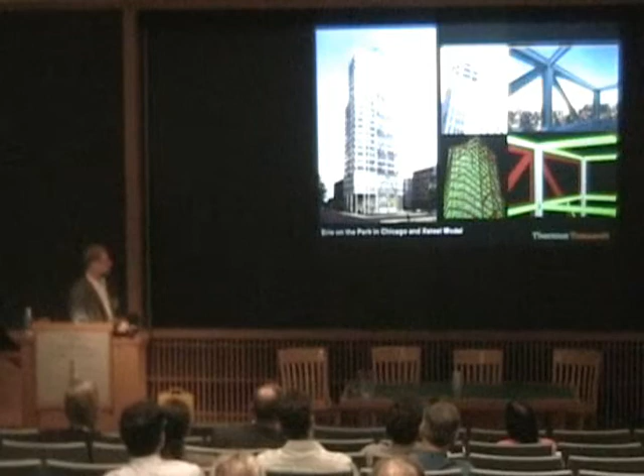But in any event, that led to our use of building information modeling, at least for structural steel, on Soldier Field. It's a major project that had to be built in 20 months, and it led the team to adopt this technology to improve the prospects for getting steel erected on time and hopefully having things fit together. As it happens, it was a partial adoption.

It was pretty much the only thing besides cladding that was done in 3D, and the only reason why cladding was done in 3D was because Permasteelisa was hired to do the cladding, and they have done so many Frank Gehry buildings that that's the only way they work now. And so they were delighted to receive a 3D model of the steelwork and, in a sense, clothe the outside of the building like a tailor and make sure it fit.

So things like the precast that you see here, which I'll get to in a second, could have been added into that model, but it wasn't. There were a lot of other things, mechanical, electrical. So it's a case study of partial adoption rather than full adoption. And the lesson learned from that is it's still worth it. It's still worth jumping in and trying something, not waiting until everything's perfect.

And these are some examples of, this is again a program called XSteel, which later has been termed Tekla Structures. It's from a firm in Finland. And it's among a handful of products like this that are vertically integrated within the steel industry that tie together all the way from the design end through cutting and punching and erecting steel. And it really is what you see is what you get.

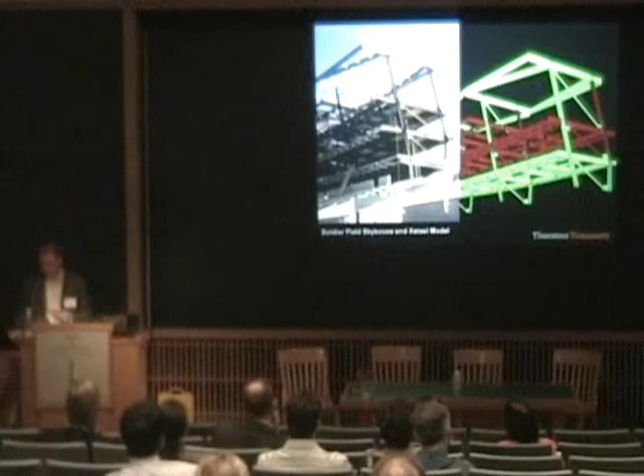These are other examples of that. These are really the kind of things we saw for shop drawing submittals. Speaking of shop drawing submittals, this is one of them. So this is how we review shop drawings. Rather than look at thousands, tens of thousands really, of piece drawings, drawings of each individual piece with holes cut in it, which are somewhat meaningless because they're not in context, we don't ever look at any of those. We're just looking at things in 3D and then more global erection drawings. And that sort of speeded the process.

And this is fundamentally why the steel industry has adopted this. If you're still in business, to borrow from Thom Mayne, if you're a steel fabricator and you haven't invested in equipment like this, you're probably out of business because your competitors have. Now, in order to run this equipment, you need computers, and you have to get code into that computer.

And until programs like XSteel came along, this is the sort of fallacy of the old way of doing things. In the old way, I would do a design drawing that would be 2D. I'd send it out to bid. Someone would win the bid. Then he'd do a whole new set of drawings called shop drawings. He'd send them back to me. I'd look at them. I'd find any errors I could. I'd stamp it with a stamp that said something like, even if I make a mistake, it's not my fault. Because that's what it says in the contract. And I'd send it back.

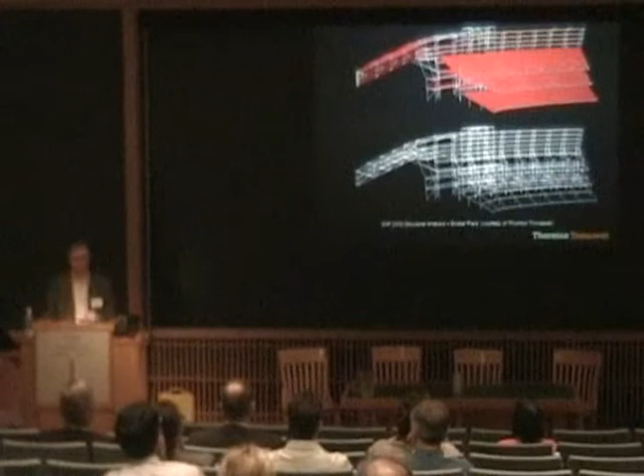So that's the reality of the steel industry, and that's the reality of most industries that produce products that we use to build buildings. And that's why people that can embrace that technology figure out how to use it for you rather than against you. Doesn't mean we have to build cookie cutter buildings. We can build great architecture, as has been proved by Frank Gehry, but we have to learn how to use that system. So that's a long sort of preamble, but the steel industry really has set the stage for this.

Now, in the meantime, it's taken a while for the software industry to catch up. The steel industry, this is a typical sort of three-dimensional model that we used on Soldier Field. Back then, 6 years ago, that was not integrated with the modeling side. So like we have been doing for decades, we've had to do that model and start a whole new series of models for representation. As someone said earlier, this sort of set of the analysis side versus the, Kate said

that there's these two worlds. Now those are being merged, at least on the structural engineering side. Tekla has merged it, Revit Structure is merging it. And the notion is that we build one model, we continue to update it to reflect coordination with architecture, mechanical, and all the other constraints. But at the same time, we're able to go away and do analysis.

And an example of that is Revit Structure. Here, in fact, how it does it is it carries two representations embedded on top of each other. That's fundamentally at least how Revit does it. And there are other ways of doing it, but an easy way to do it is when you put a column in or a floor beam, even if it's sloped, you create a sort of theoretical model, and we've seen some of those today, that's in the background, and those two things are linked.

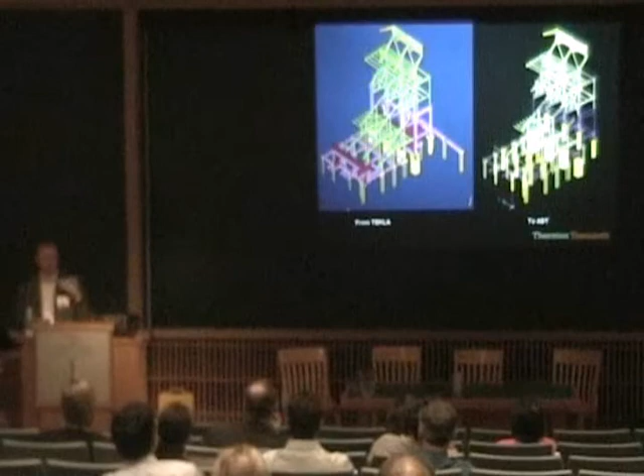The problem is interoperability. How do we get things from one type of software into another? And Tekla, which we use for steel detailing, we have found ways to get it into Architectural Desktop. There are ways to get it into Revit. So that, again, wasn't so 6 years ago. So things are moving quickly here, and in a good way. This technology is actually changing the way we work.

We now have a group in Kansas City that does steel detailing, that does shop drawings. Now that's something that has not been part of the American practice. In fact, it's not uncommon in other parts of the world. In places like Finland, the structural engineer would be expected to produce shop drawings as part of their work. There is no shop drawing review process because they're produced, and, like the petrochemical engineer here, you hand them off to the fabricator to make it.

Now, what happens when you start detailing steel is the barriers, or the question of what's structural steel. Over the last few decades, it's been: it's steel, no, it's miscellaneous steel, I don't do that. More and more structural engineers are doing miscellaneous steel, they're doing the cladding, and things are becoming more integral. And I think it's so much more evident when you look at a building information model where things aren't abstracted from the structure alone versus the miscellaneous metal.

And you begin to see that some steel fabricators would be delighted to fabricate this stuff too, along with the main steel, and erect it all in one piece, again improving efficiency and actually fit-up and things like that. Moving to other structural materials, the precast industry, again, this is fairly recent in the last few years. The precast industry, at least in North America, took note of what the steel industry was doing and said, you know, we've got to catch up with those guys. So they put an RFP out. They worked with Chuck Eastman from Georgia Tech, and Tekla won that bid.

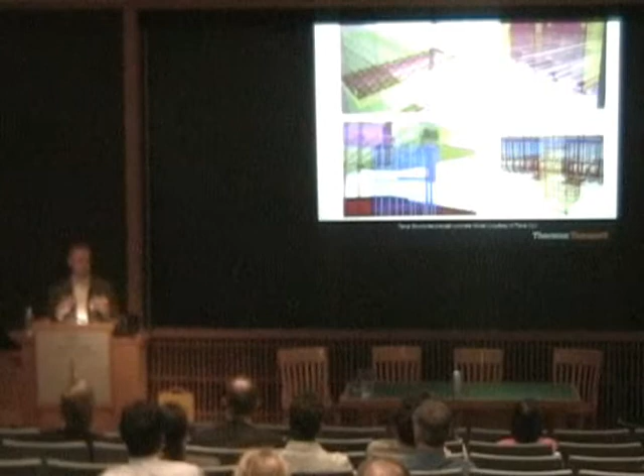So Tekla agreed to write a precast modeler that would do pretty much what they've done for the steel industry, which is to create solid models for units and model every piece of rebar, steel embed. If there's steel, model that, but show how precast fits within the global context as well as all of the parts. Use that knowledge that's embedded in the model to run machines that cut rebar and bend rebar. Every industry's got machines that do things. They do. The problem is they're not talking to each other. And that's maybe the biggest goal, how to hook that stuff up so we're not wasting energy and making mistakes.

In Finland, which has a lot of timber up there, Tekla is used to model timber. As you might imagine, there's lots of steel as well. And I think that's the key breakthrough for Tekla: now it's Tekla Structures, because they'll model any kind of structural material, both in terms of analysis and modeling, and use it to fabricate things. So it's a very different product, and they aren't the only ones, but I think they're probably the leaders in terms of trying to, in a holistic sense, look at structures, all structures.

And in fact, most of the structures I design are mixed systems. I very, very rarely design only concrete, only steel, only timber. It's usually some mix of those systems. And I think a modeling system that addresses that makes a lot of sense. Here's some of the details of steel base plate details where the timber members come together.

And then finally, I think this is the sort of recognition that's going on. I think it happened some time ago in the UK. The recognition that cladding is yet another structural material that needs to be dealt with, at least from a structural engineering standpoint. There are lots of other energy, enclosure, water and thermal reasons to look at cladding, but certainly from a structural engineering standpoint, it's something that structural engineers in the United States are getting more involved with.

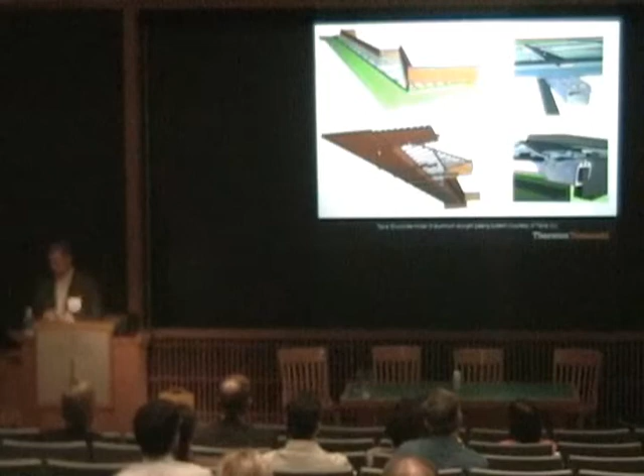And again, manufacturers like Permasteelisa have figured out how to make money by investing in these kinds of software programs and machines that make cladding. Right now, Permasteelisa is using CATIA because it happened to be the product they purchased when they had to do their first Frank Gehry building, the Fish in Barcelona, which was the maiden voyage for CATIA for both Permasteelisa and Gehry's office. But these are some manufacturers in Scandinavia that are using Tekla to extrude aluminum and figure out how cladding fits together.

I'm going to move on now to sustainability and some of the issues that I've become aware of. It goes back to Finland. I've been able to go to Finland a couple times and meet some people up there. And on the mechanical side, which we don't really do, but I'm terribly fascinated by, Granlund, a major MEP consulting firm in Helsinki and the Baltic Sea region, has developed a complete three-dimensional workflow. They only work in 3D.

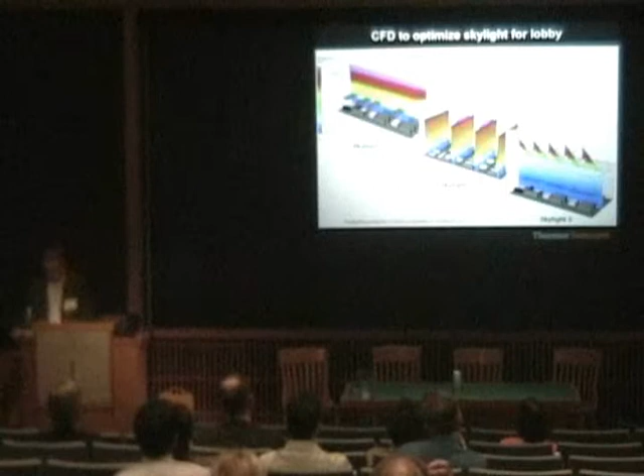They use the model that they build initially as part of their design process. If an architect isn't in 3D and BIM modeling and can't give them a 3D model, the first thing they do is build a model to match the 2D drawings the architect gives. And they'll study daylighting issues. They will use CFD analysis to study airflows and thermal issues in things like arenas. And again, these are very early studies that they do, not in the CD stage.

And the net result of all this work, the continuing effort to build a 3D model, is that they work in 3D coordination, constantly working on the ducts and layouts, and those are all linked to analysis programs, just the way structural engineers are using analysis programs linked to the model. Every one of those ducts is linked to a diffuser that's linked to a room size that has certain ventilation requirements, and if those requirements change, or if you study different cladding systems, those duct sizes will change. So they have fully invested in that, at least in Finland. I'm not aware of anybody in the United States that's as advanced as they are.

They also do a lot of 3D life cycle studies. Now, I know Autodesk is working hard on getting their building services modules for Revit up and running that would link to analysis programs. These are some images I got from Phil Bernstein at Autodesk on the kind of full coordination between architecture, structure, and mechanical that they're working on for Revit Building. And we're adopting Revit Structure at Thornton Tomasetti.

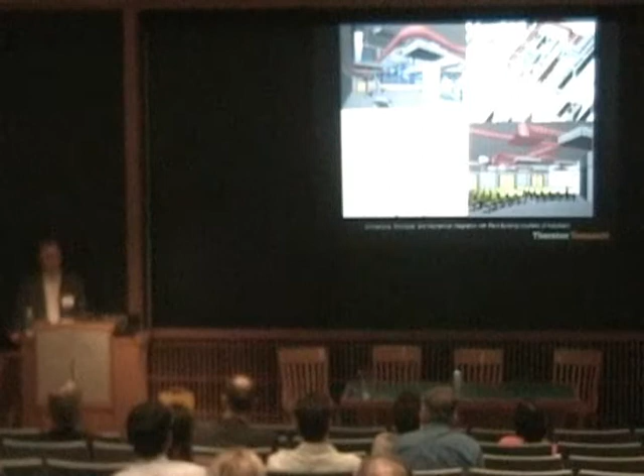In fact, I've been very surprised the last six or seven months. I've obviously been very involved in this issue for several years now. But the acceleration of clients of ours talking about it, doing it, wanting us to do it, in the last six months has been nothing like the previous couple of years. So I think there is an acceleration now; if you're not getting ready for it, it's definitely coming. Things like the GSA: we're starting our first GSA project that's demanding the use of 3D. We're actually using Revit in that case. It didn't have to be Revit.

But you don't have to use one suite of projects. That's one suite of software. That's the sort of big advantage coming out now because of these open standards that are being promulgated now.

Here's an example from Tekla of ArchiCAD architecture. There's the Tekla Structures for the precast and things like that. And then there's a program called MagiCAD with the ducts that Granlund uses. It's a program out of Scandinavia that apparently is not available anywhere other than there, but that's the program they use that's linked to the analysis programs.

And so fundamentally you have these separate models and they're all combined together. In this case, a program called Navisworks, which is sort of a Swiss Army knife of a program that will accept any standard and basically do clash checking. Firms like Mortensen are using Navisworks to check how different systems come together.

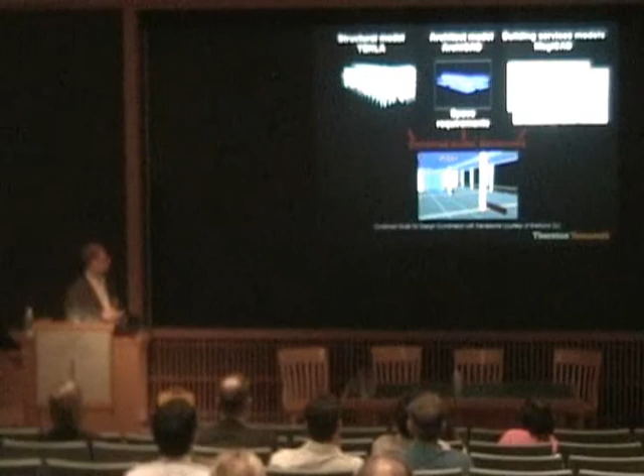And I think that's the other thing that's going on is the notion that an architect or a building modeler or someone else is going to model everything. While they could do that, what's really going on is that we are going to do our part. Hopefully we'll find some mechanical engineers in America that will do that part. But that's really been slow. It's been hard to find people; there are firms doing it, but they're doing it reluctantly.

And of course the architect's working in 3D and they're sort of brought together. And I'd say there's more work to do on that, but we're much further than we were 5 years ago. And I have no doubt that 5 years from now, there'll be great progress made.

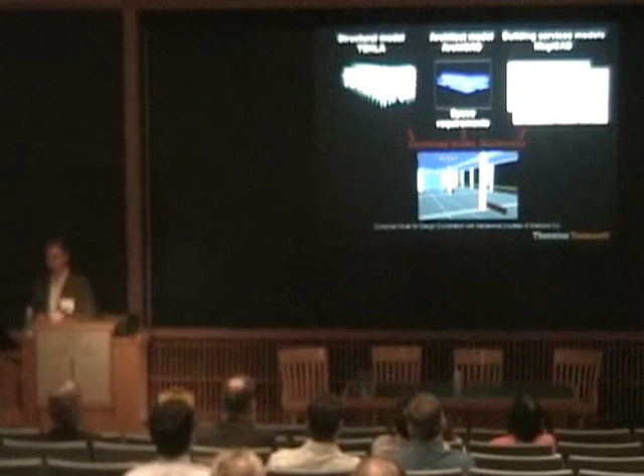And then finally, Bentley, which I think has a bigger presence in Europe, particularly Europe. Firms like Norman Foster, Nick Grimshaw, and others use MicroStation. There are a few here. Morphosis uses MicroStation, but it's pretty thin. It's mostly used in the transportation area.

Yes, there are some firms that use it, but as you can see here, this looks like more of a fairly heavy industrial project. I think this might be in Japan. But anyway, I got this from Bentley as an example of their systems integration. It's very sophisticated. There's a lot of good software out there, and much of it actually will talk to each other. Maybe not fully. Maybe you'll lose a few things, but it's a good time.

Well, that's design, but as I said briefly earlier, I think it's more than that. If we just do that and see that things fit together, we're not taking full advantage of everything that the building information model has to offer. And smart contractors like Mortensen and Webcor are begging for these models because they will use them to fairly quickly determine what the cost of the building is, because all the areas and volumes are there. They can link them to spreadsheets that determine building costs.

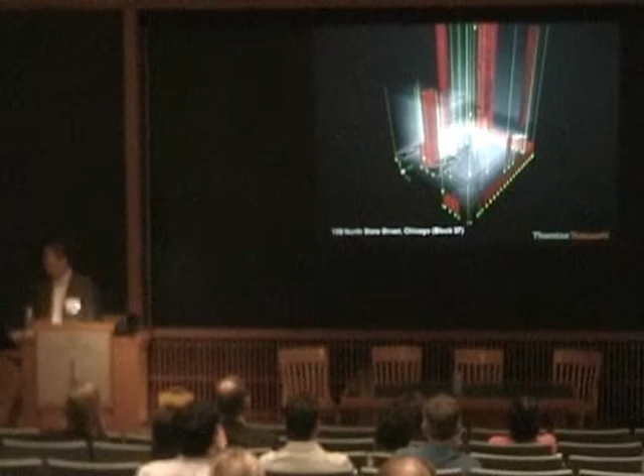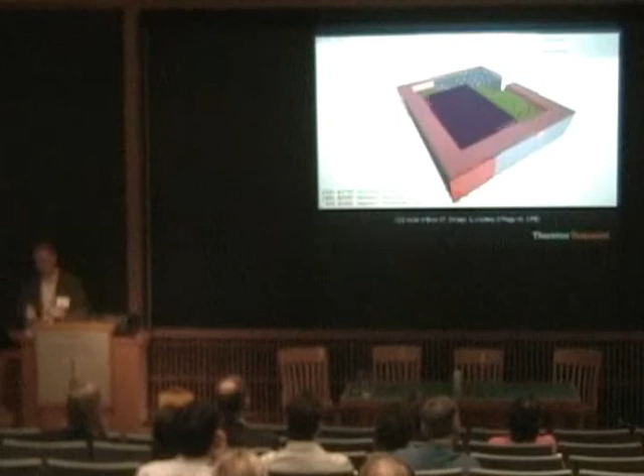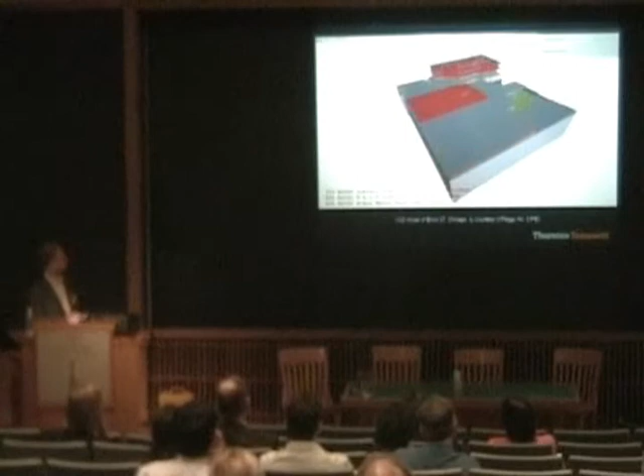And Peggy Ho from the Center for Integrated Facility Engineering at Stanford did a 4D model. We all agreed, notwithstanding the fact that we weren't going to take it all the way through, that we'd do some early schematic design work, where she would study this notion of how do you tunnel, this is all dirt magically disappearing in chunks, and how do you do that while you're building up? See, there's not a lot of up right now. But now you're beginning to see some up. Actually, there's about a 4-story retail area around here that's going up as well.

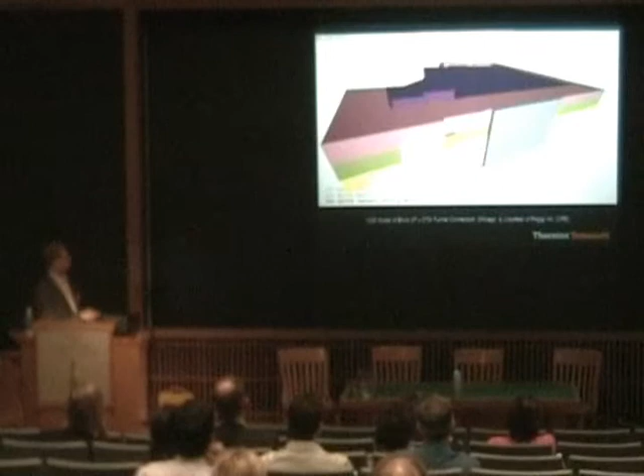And there's the second one, which shows the subway connector, one of those subway connectors, how we're going to tunnel out through that and create that. So there's a whole area of construction management, and how that interfaces with architecture, that very few people are researching right now. I would say Stanford is the leader in that right now.

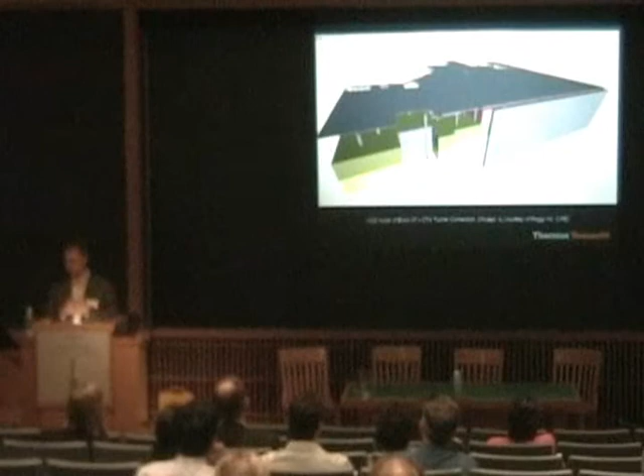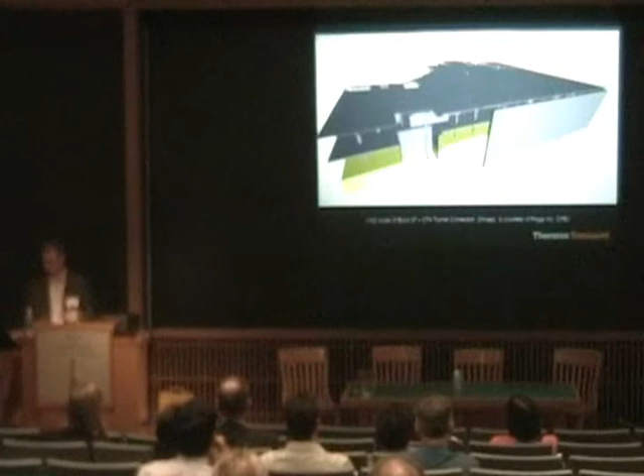The reason that this is all valuable, building information modeling is valuable for them, is because they get information-rich 3D models that tell them a lot of things about that material, and they can add more information as they go. And so, what's next? Well, education. I'm very delighted to participate in this.

I think that this is, as someone else said earlier, a process that's coming from owners. The Construction Users Roundtable has demanded that somehow we begin using this technology. Owners like the GSA are saying we must use this kind of technology, and it's working its way through the profession and through education. There's a lot of contractual insurance issues, and that downstream use of data. What if it's wrong? Those kind of questions are out there, but the probability of having it right is in a way much higher than the current system. So that's why we have to keep figuring out how to get there.